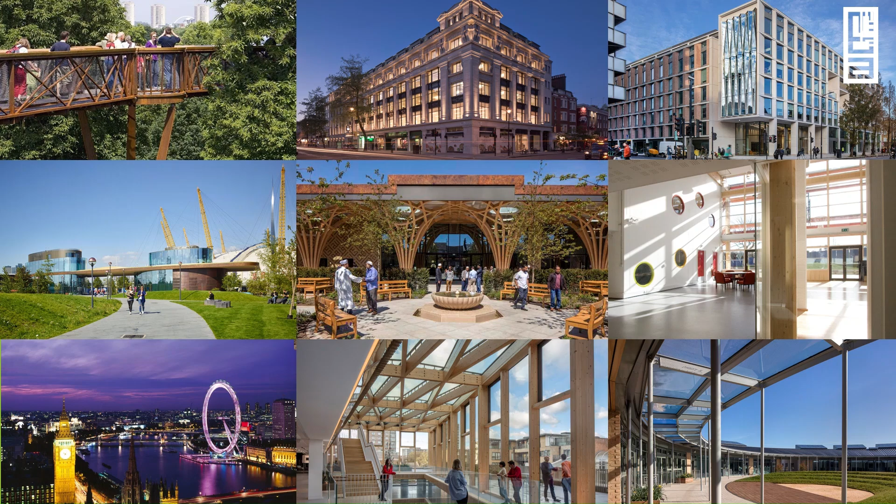I founded Marks Barfield, as we've just heard, with my partner David Marks more than 35 years ago, and our project portfolio is unusually diverse across many sectors: culture, education, infrastructure, leisure, workplace, public realm, and the sacred. And it also includes self-generated projects like the London Eye and the Brighton i360, where we made a leap to become entrepreneurs as well as architects.

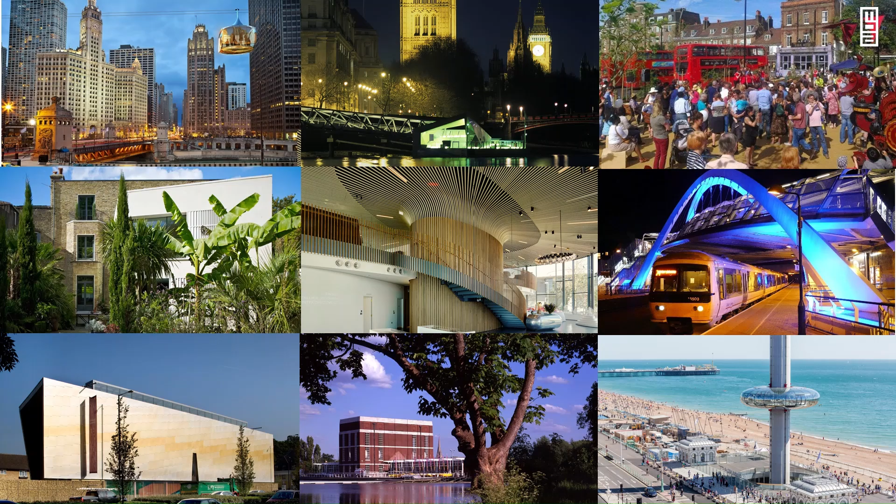We've been told that our work is difficult to categorize, which we relish. We don't have a house style, and because we have kept the practice relatively small, we don't have a huge portfolio of completed projects. It's quality over quantity, and every project gets huge attention and is unique, coming as it does from a thorough understanding of the client's needs and aspirations, the site, its context, its history, and broader social and environmental imperatives. All our projects are site-specific and deeply rooted in their place. So it would be strange to us if each project was not very different.

We operate from our studio in Clapham South in London, and we've won quite a few awards. We've had a 50-50 gender balance from the beginning. We've got a commitment to a technical edge. We like working with engineers, and we have a strong social ethic. This is something that we wrote together in the early days about the belief that design is a powerful tool for good, both social and environmental, and at its best it improves the quality of people's lives and lifts their spirits while drawing on a minimum of the Earth's limited resources. So that's really been a kind of guiding light for the practice since the beginning.

We've always integrated sustainability into our projects from the very start, but now, with the climate crisis, we realise that conventional sustainability is no longer enough. Our ethos is one where we like to work in true collaboration with engineers, right from the beginning, such that the design emerges from the way the building works, not just from the way it looks.

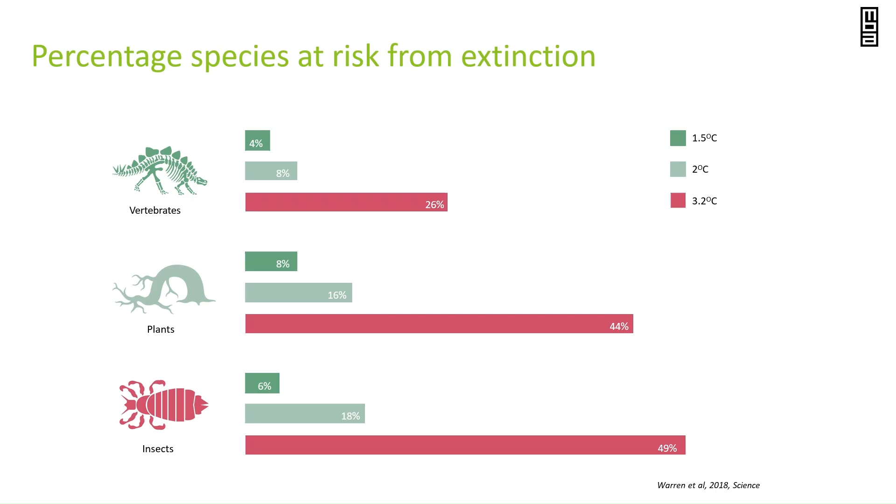And according to the Climate Action Tracker, we're heading for 3 degrees by 2100. And if you're in any doubt of what 2 or 3 degrees means, this is what happens to species extinction in terms of vertebrates, plants and insects. But I'm not here to be a doom monger. I believe there is hope because there are solutions. And I always love this cartoon because it shows that if we respond appropriately, it can actually make the quality of our lives better, not worse.

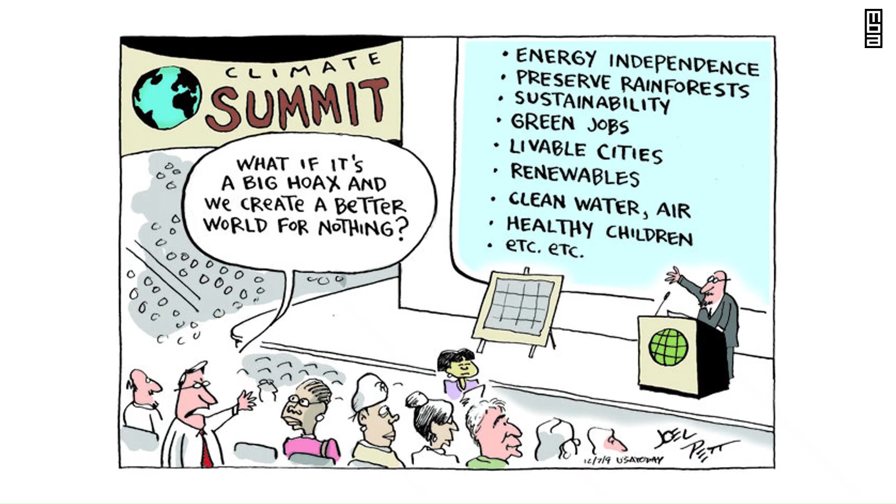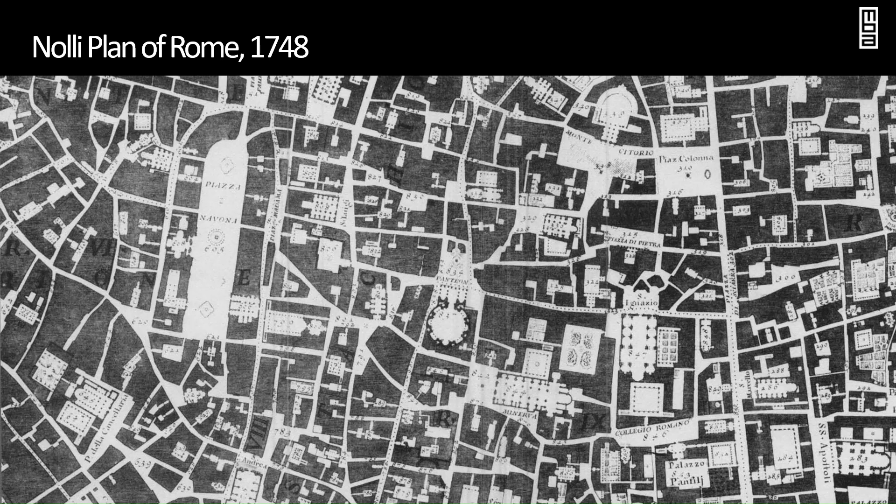Now, I'm just focusing on the architecture of place. I'd like to start by referring to the Nolli plan of Rome from 1748. And it was revolutionary at the time because it was the first time anyone had looked at a city through the lens of private and public space, where private and civic buildings are dark and the public spaces are white. And I'd also refer to the wonderful Japanese concept of ma, which is defined as the spaces in between, not as vacant voids, but as opportunities to evolve a sense of balance, tranquility, and beauty.

And this is one of the places. So the point is that placemaking is not just about the buildings, it's about the spaces between the buildings, what we now call the public realm. And the fact that we can create those spaces with the buildings, I mean, this is one of the best examples I know of where spaces are created with the buildings. And we've got to think of London squares, think of courtyards, think of all of that.

Now, this is one of our first urban realm projects near our office in Clapham Old Town. And we were brought on board by a local authority because it got itself into a bit of a pickle. They were trying to upgrade the triangle that you see there and turn it into a public space. And it's not a simple space because you'd still have to accommodate the buses with bus stands and bus stops. And the previous designers had taken all the buses out and then created a wall of buses between the space and the common, and this did not go down very well. All of a sudden there were these action groups that were starting: no bus wall, save our Clapham Old Town.

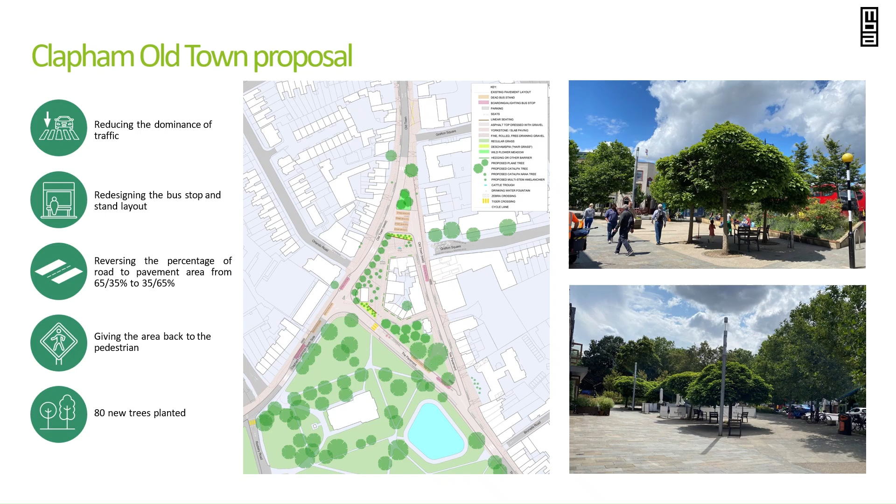And we stepped in, and through a good deal of public consultation, we redesigned it to get rid of a gyratory, strategically redistribute the buses just around, while keeping some still in the middle. And we managed to reverse the area from 65% road and 35% pavement to 65% pavement and public space to 35% road, as well as planting more than 80 trees. So we managed to transform the area completely, giving it back to pedestrians. And this is the result of the space that's been created, with this planter at the back that hides the buses. And those are the amelanchiers out in the springtime.

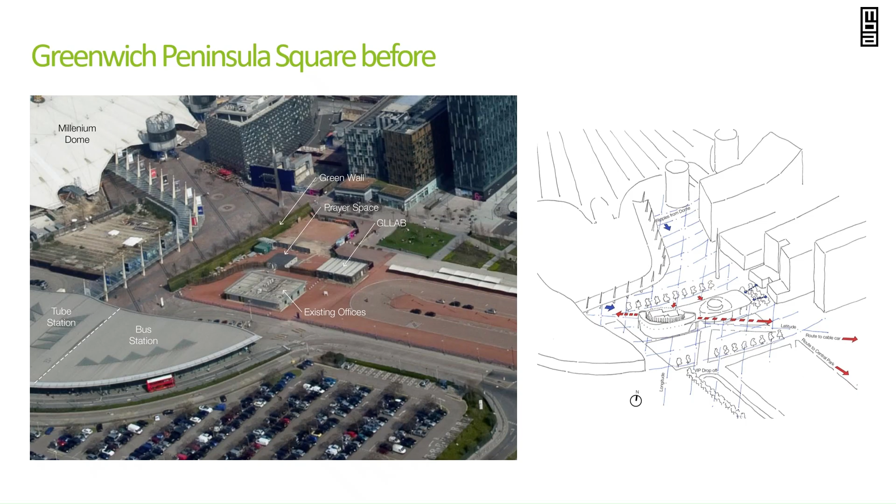Now, in Greenwich, we were asked to design a marketing suite, office, restaurant and cafe and a sky bar on the south side of Peninsula Square by the Dome. And this is the site before we started. And despite being a small area within our brief, our aim was to define the southern edge of the Peninsula Square and for it to act as a gateway to the south, to the cable car and to the Central Park. So we created a pair of curved glass pavilions linked by a clear span canopy, and that was inspired by the geomagnetic lodestones which were used in early compasses and enabled the great world voyages of discovery that the maritime heritage of Greenwich owes its name.

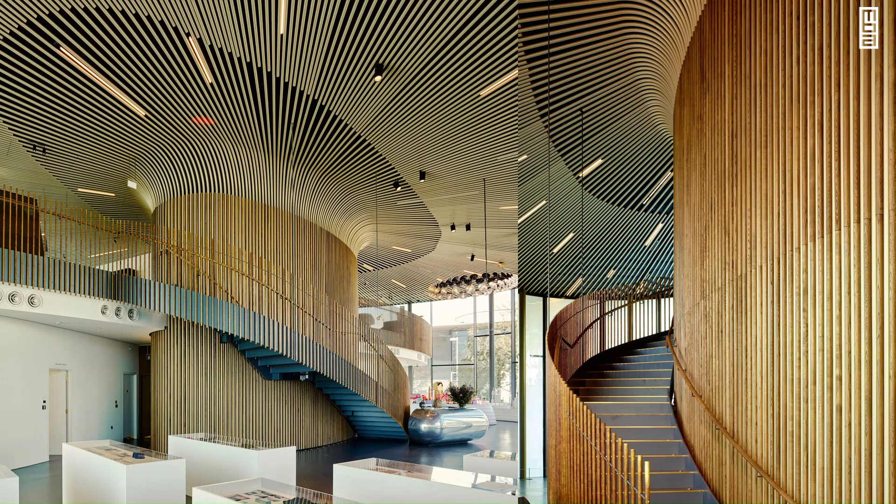And the canopy soffit traces the magnetic field patterns linking the pavilions, creating a space for markets and events. This is the Ma space, if you like. And this is what it is like on the inside. There was actually a gallery there for many years. Sadly, it's now closed down.

And this is a school that we did for University of Cambridge, which I'm not going to talk about in any detail because I don't have time within the 45 minutes. But it was definitely designed from the inside out. But in doing so, we did create this central space, the Ma space, if you like, in the middle of the school, that's used for all kinds of events.

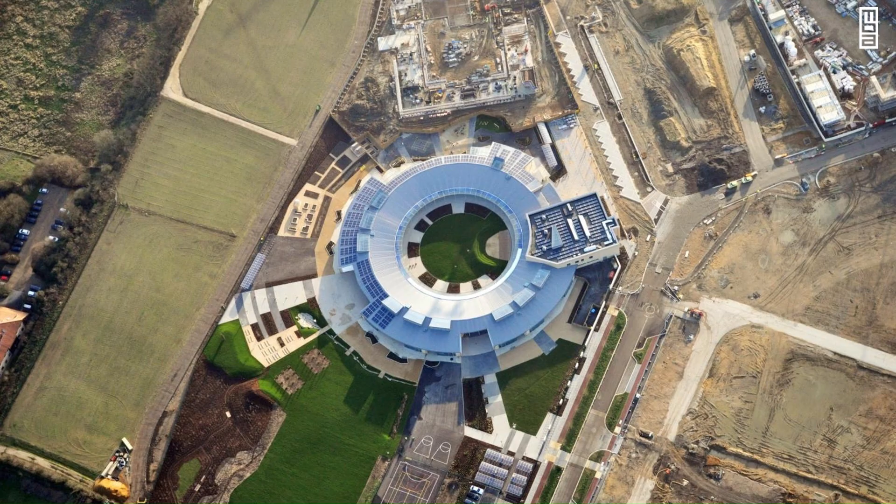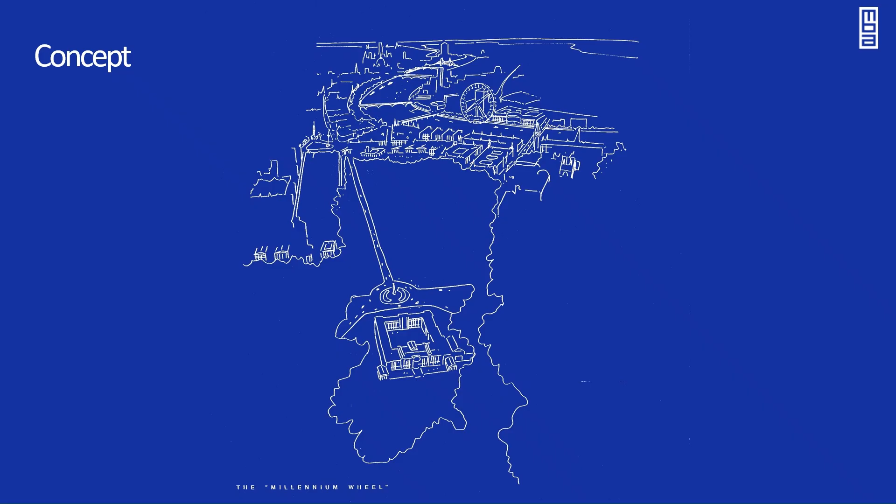Now, another project that we've done, also deeply rooted in its place, is the London Eye project. And it was an entrepreneurial project, as has been mentioned, that came out of a competition in 1993, organised by the Sunday Times and the Architecture Foundation, calling for a landmark to celebrate the millennium. And we came up with the idea of a 500-foot wheel on the South Bank to allow visitors to see London from a new perspective. We didn't win the competition. In fact, nobody won the competition, but we thought it was a good idea, so we started the Millennium Wheel Company and put in a planning application.

The planning application came to the attention of a journalist on the Evening Standard, Mira Bar-Hillel, and she took it to her editor, who was Stewart Steven at the time, who loved the idea and ran a Back the Wheel campaign. And I think he asked the great and the good what they thought of it, and if they liked it, he would print what they said, and if they didn't like it, he didn't. And it also came to the attention of Bob Ayling, who was CEO of British Airways at the time, because he was looking for a Millennium project.

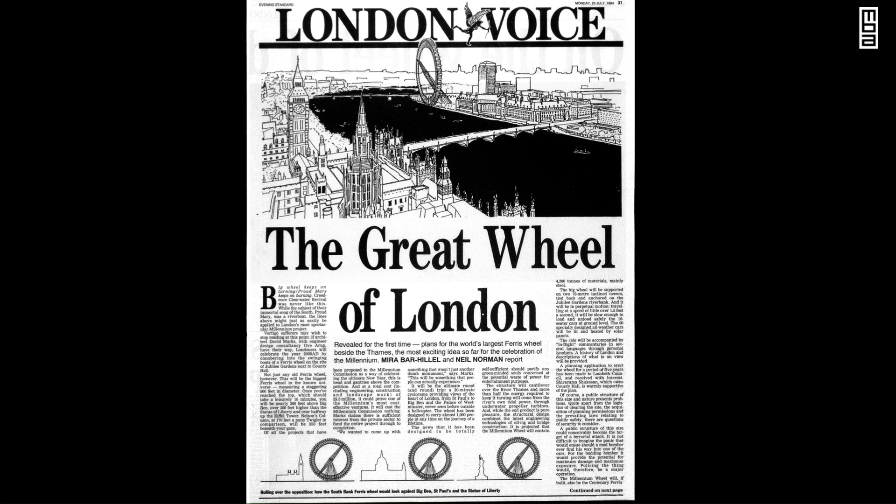And he joined us. He took 50% of the company and loaned the company £700,000. And with that, we eventually, 2 years later, gained planning permission. But back to why this is rooted in place.

If you draw a circle around London and you look for its centre, it is virtually there on the South Bank. And because the project is about seeing London from a new perspective, where better to do it from than its very centre? And the other really important thing at the time was that the South Bank was looking for regeneration. I mean, we found this statistic that apparently 1.5 million people walked halfway across Westminster Bridge, took a picture of the Houses of Parliament, and then walked back north.

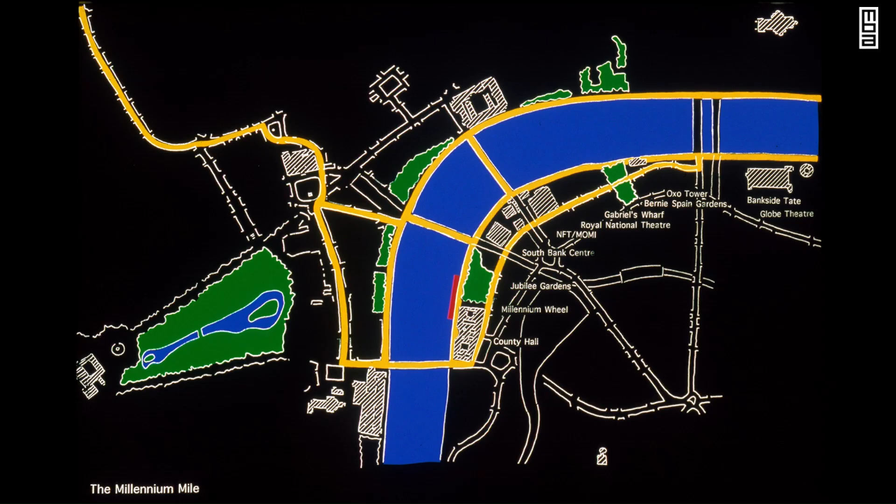And so, of course, what we wanted them to do is come south, which they do in their droves now. So that was another very important factor in placing the wheel there on the South Bank. And of course, it was the site of the Festival of Britain in 1951, so it already had a celebratory heritage, if you like.

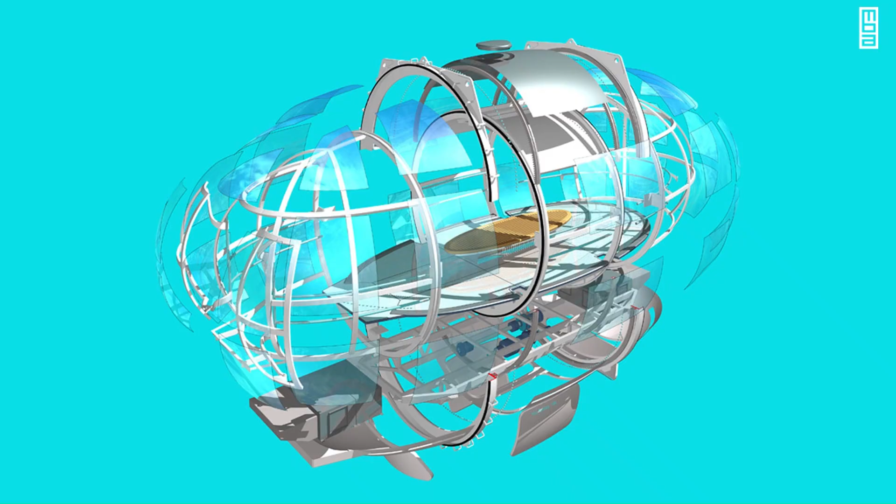Now, I don't have time really to tell you the full story of the London Eye, so just to say that this was the eventual design of the capsules, and I think one of the things that makes the London Eye unique is the fact that the capsules are on the outside, and that was very deliberate. It made it much more complicated because we had to have drive mechanisms to keep them horizontal. But the reason why they're on the outside is so that when you're at the top, you have 360-degree views, almost like being on top of a mountain in the middle of a city. That was what we were after.

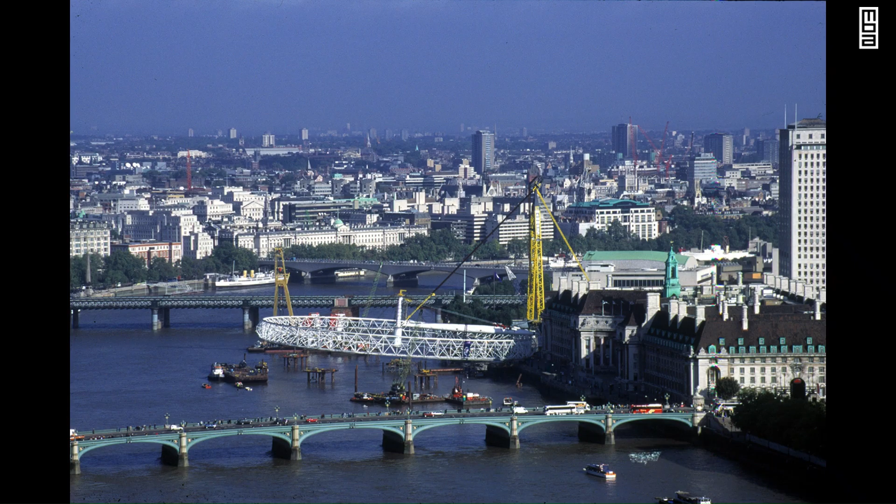But the most difficult thing was getting the funding, and it took almost 2 years, such that we had to actually build the wheel in the end in 15 months. And of course we had the immovable deadline of the millennium. But I don't know if you may remember that we built it horizontally in the river. This is it lifted to 30 degrees. We were told it was the biggest lift of a single object at that time that had ever been done.

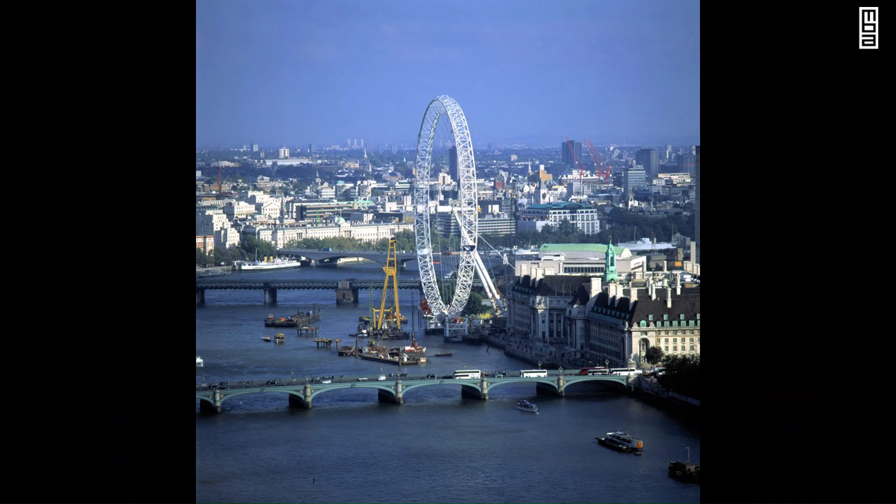And this is Boadicea welcoming the London Eye onto the skyline. And this is it vertical, without all the capsules. And of course we did make the deadline, even though there weren't people in it. And the Evening Standard was appropriately enthusiastic. And we actually went out to dinner with Stewart Steven, and he told us that he actually didn't think we had a hope in hell of getting it, but he was quite happy to be proved wrong.

And one of the things about the project that I'm most proud of is that we originally had 5-year planning permission, and we got it extended to 20 years, and David and I suggested that as part of the Section 106, 1% of the ticket revenues from the London Eye should go to the local community. And that has happened over the last 20 years, and it's amounted to more than £14 million. And that's really to go to community groups, but also to help with the maintenance of Jubilee Gardens and maintenance of the area. So yes, I'm very pleased about that.

I'm going now to talk about a fairly recent project. It's a mixed-use project near Euston, and top right you can see what the building was like before. And it combines office, residential and retail at ground level. And you can see in the diagram in the bottom right that the residential is kind of slotted in to the side. And we create these stepped landscape terraces at the rear, which continued through and outside and created double height spaces which were articulated on the facade.

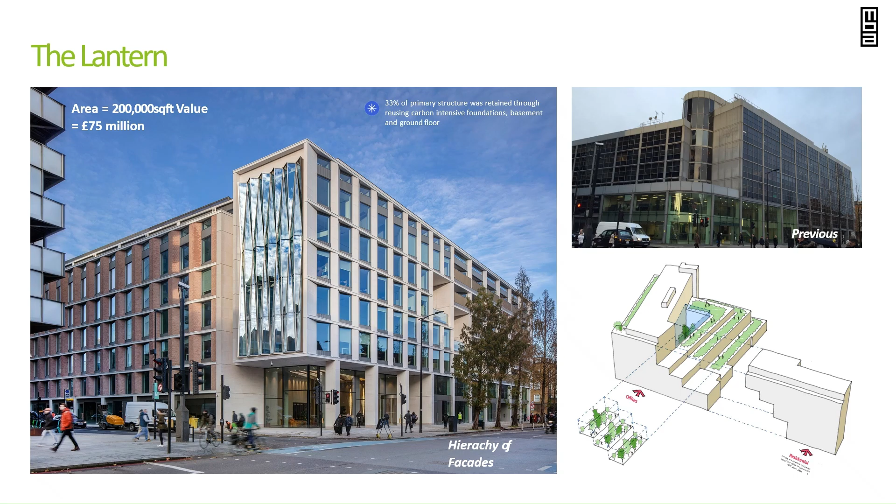And we didn't completely demolish it. We retained 33% of the structure. And it's located just north of the West End. And when we first visited the site, we noticed that because of the bend in Hampstead Road, because that's Hampstead Road that comes up from Warren Street Tube Station, and it just bends at that point, the site is actually very visible from quite a long distance away. And so we saw that as an opportunity to create a feature that has actually become the kind of building's identity.

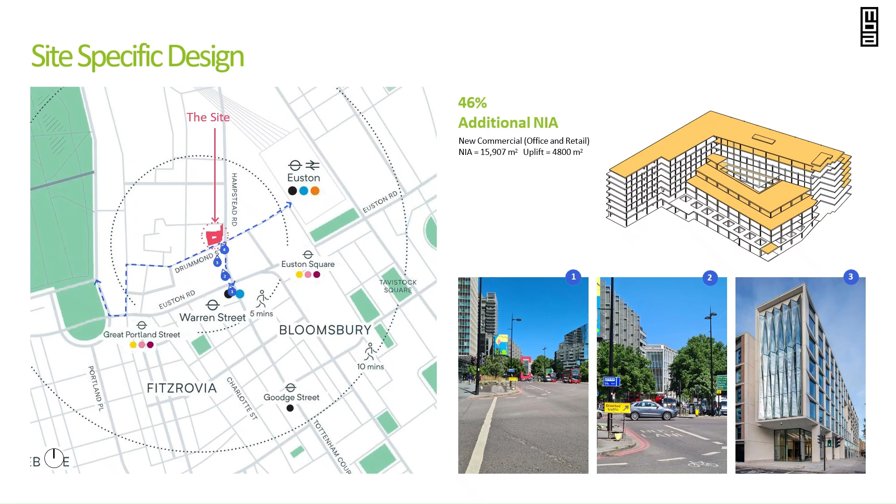And it was also an opportunity to create special spaces within the building, creating long views that look down out at Tottenham Court Road. On this project, we made health and well-being a major focus of the design, after we appreciated that in a typical office building, 90% of the costs are actually for staff. So happy people, it's a really important thing.

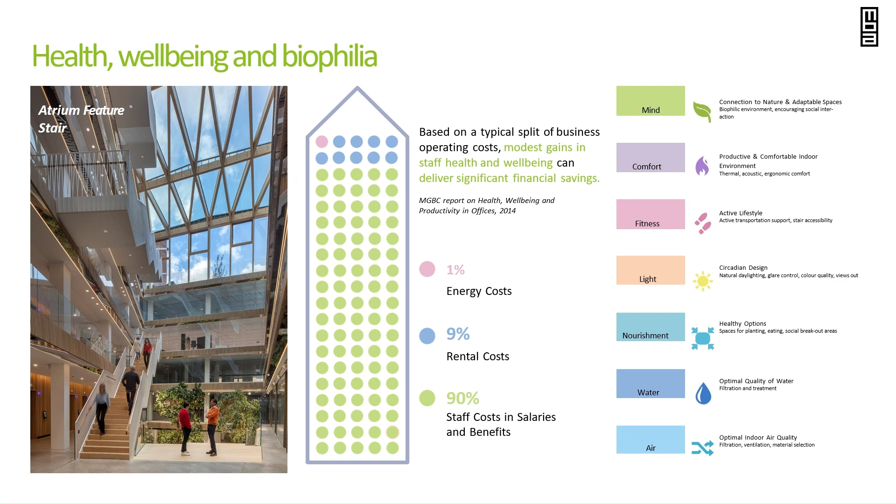So we really focused on trying to make sure that people were encouraged, for instance, to use the stairs, not necessarily go on the lift, that there was plenty of biophilia and natural materials. So you can see on the left, this is the atrium, and we have trees growing in there, and so this is the atrium.

It's actually a multi-tenanted building, so there's a number of different companies, but we created this kind of commons area at the bottom of the atrium, which was actually where the car park had been. And that's where all of the people from the different companies can actually meet and interact, and they do, apparently, and they appreciate it very much.

We also created little kind of moments of delight. So in the spandrel panels around the atrium, we put these mirrors that actually just keep reflecting the greenery and kind of moments of movement in the building. And we've even got a rill, so if you go, you can hear the sound of running water. So I think the connection to nature is just so important.

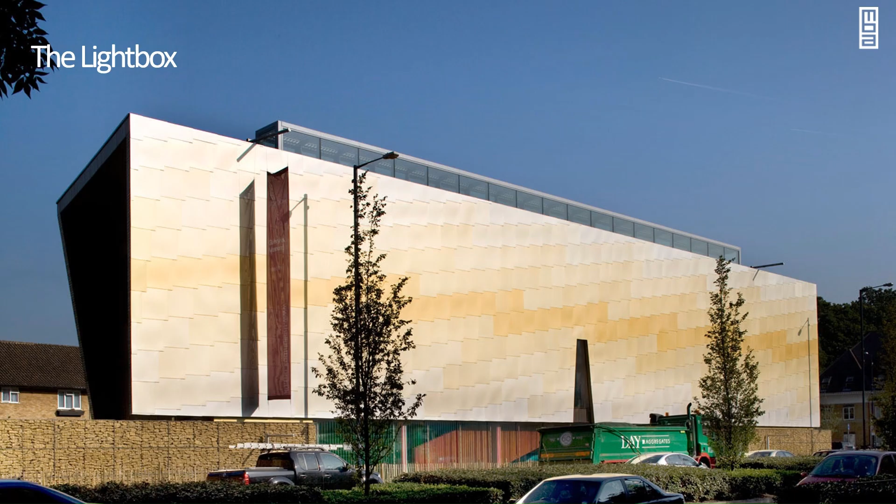And then just quickly, this is a building that's not too far from you, and we have in our audience the ex-director of the Lightbox, Marilyn Scott. So it was built on a slither of land. It's very much deeply rooted in place.

It was built on a slither of land between the Basingstoke Canal and a 5-lane highway that separates the site from the town centre. And the roadside cladding is solid and metallic to protect it from the noise and pollution, etc. And then it opens up and orients itself to the canal side. And also the building is positioned to the farthest east point to create this garden, which benefits from afternoon and evening sun.

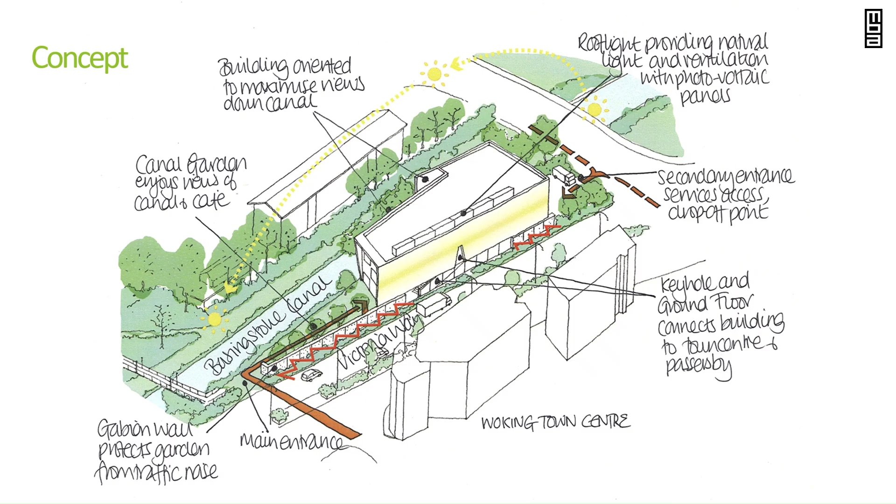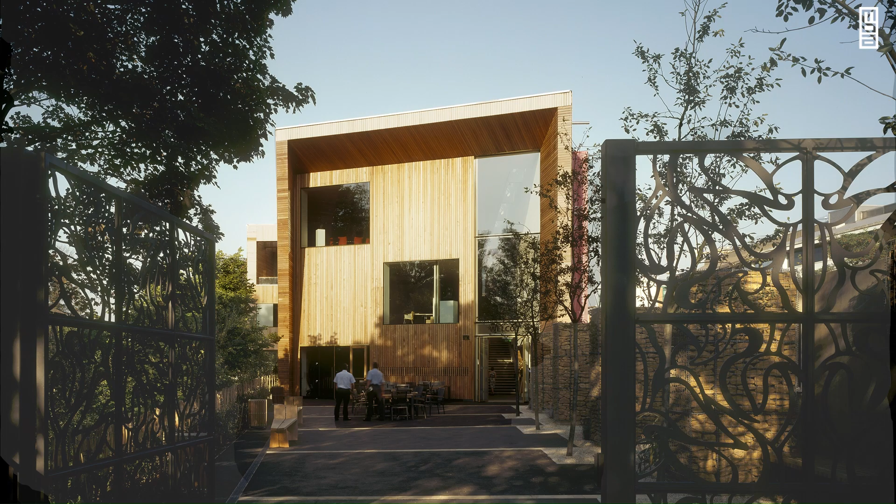It was conceived as a cultural treasure box and has got the gold and silver overlapping panels; on the roadside they are solid except for the keyhole window in the middle. So this is the garden. So all the rest of the building is orientated to the canal. It's all in timber, and it's all completely naturally ventilated, apart from the galleries, which obviously have to be very carefully controlled in their environmental aspects.

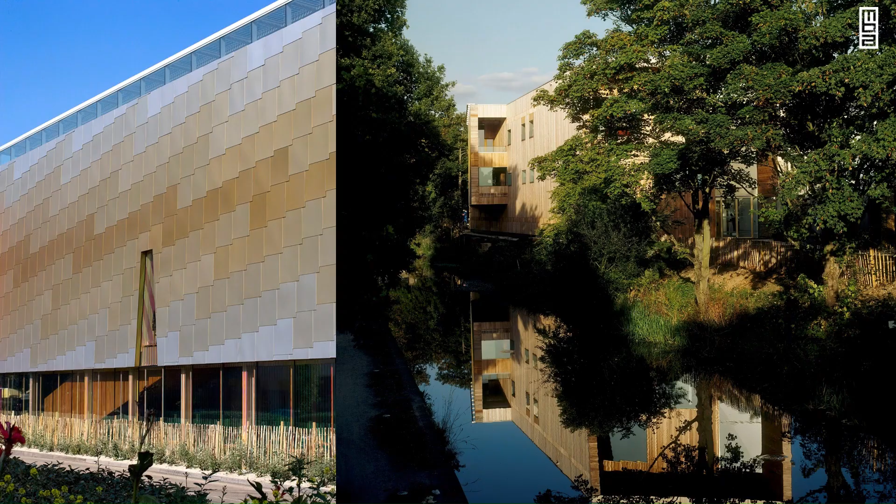And this is the canal side on the right and the road side on the left. It's quite schizophrenic in a way. And this is our treetop walkway, conceived to give visitors to Kew an experience of the forest canopy. The tree guy in Kew had spent a long time in the Brazilian rainforest, and he wanted people to have that experience in Kew.

And a very early decision was to build it out of Corten steel, because Corten is long life, low maintenance, and has this beautiful patina of rust that protects it from the weather. And it's obviously a material loved by sculptors. The walkway consists of a series of circular nodes at 15-metre centres, with 12-metre walkway sections between them. You can see it's not far from the Temperate House in Kew, or not far from the Palm House.

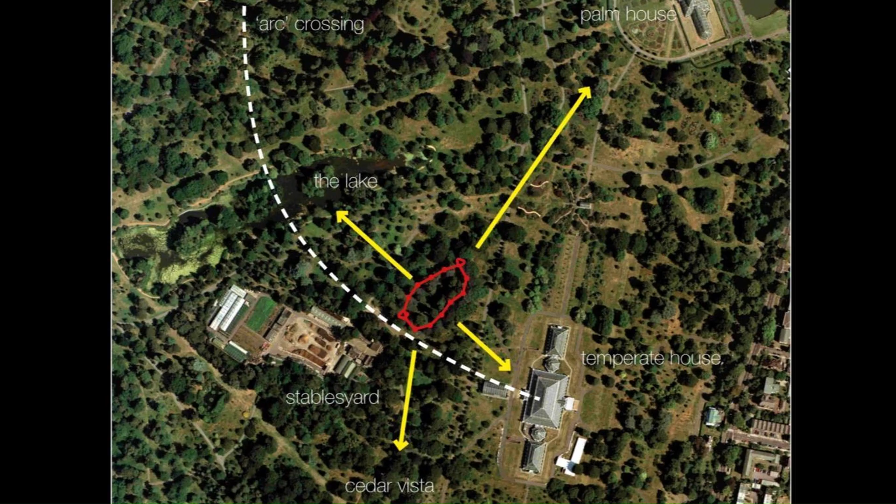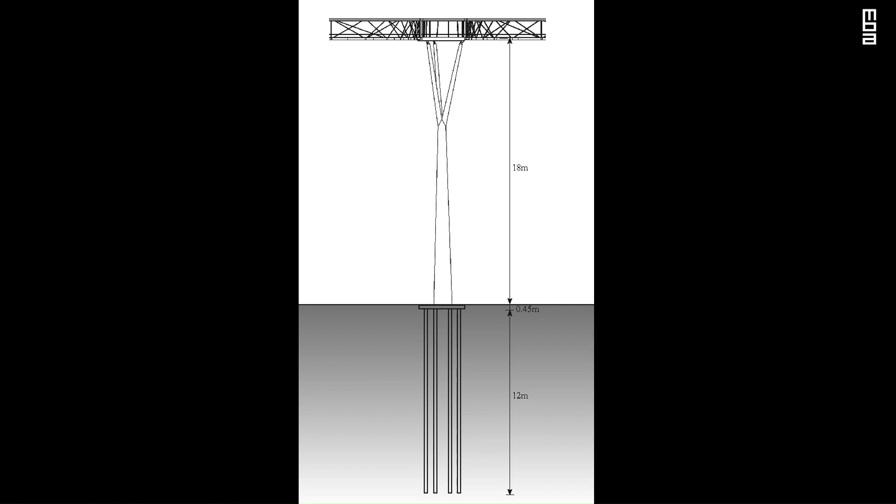And because Corten only comes in flat sheets, the pylons are triangular in section, and we could make them taper to the top, and then they trifurcate to support the circular nodes. We decided to put the structure into the handrail to minimize the visual appearance in the natural setting. And this is one of the 12-metre walkway sections laid flat. So imagine that it's actually kind of a U shape.

And you can see that it's got these sections; the structure is inspired by the Fibonacci sequence. And this makes sense structurally, that the ends are more dense than the middle.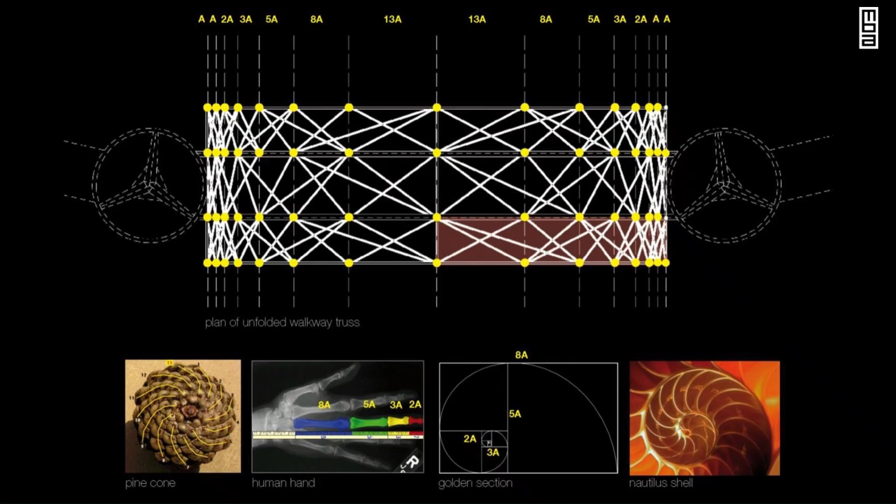So this is a kind of... And many people imagine that tree roots go down far into the ground, but in fact they spread out horizontally, and they're really not very deep. So we had to be very careful not to kill the trees that we were hoping to admire. And we had to have a root survey done so that we understood exactly where all the roots were.

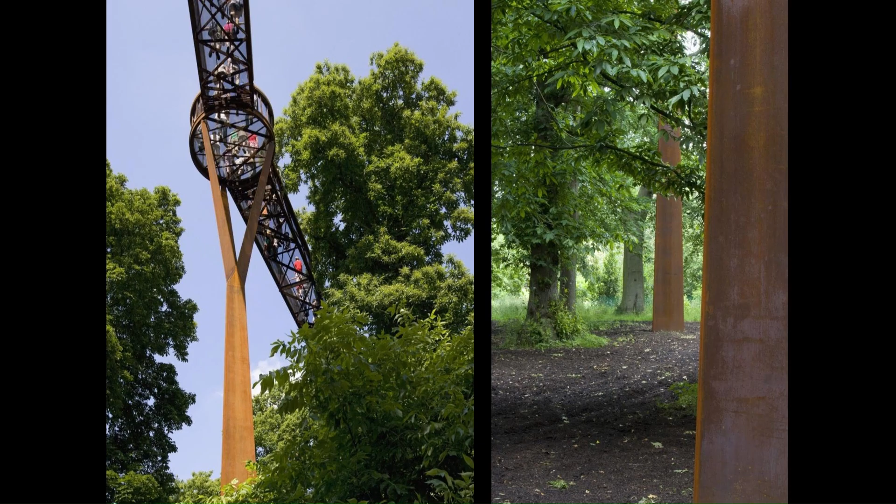And the pile caps were in steel to make them as thin as possible so that they could be hidden under the ground. And each pile cap was completely bespoke. And in fact, when we got the survey, we actually had to change the route of the walkway so that we avoided some of the main roots. So this is the walkway there, and you can see how the Corten really does. It stands out and fits in at the same time.

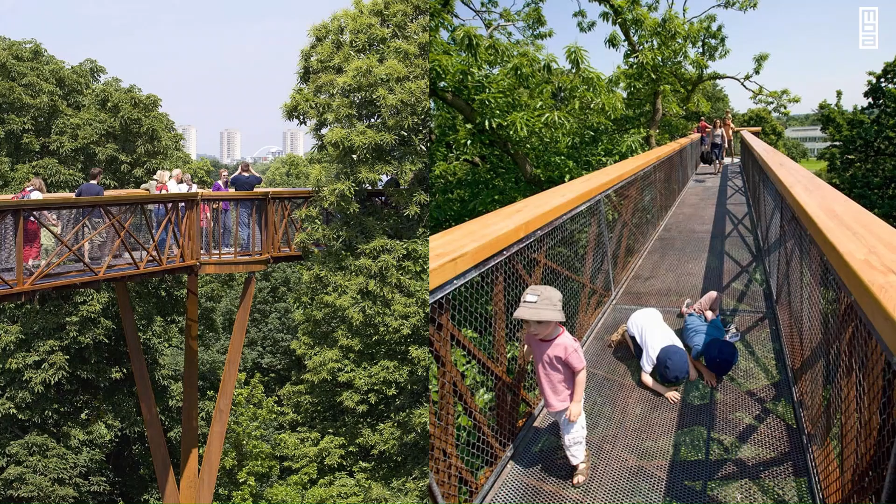And this is the walkway on the top. It's 18 meters high. It's quite high, but you do feel safe because we made the handrail quite a bit higher than you would normally make it.

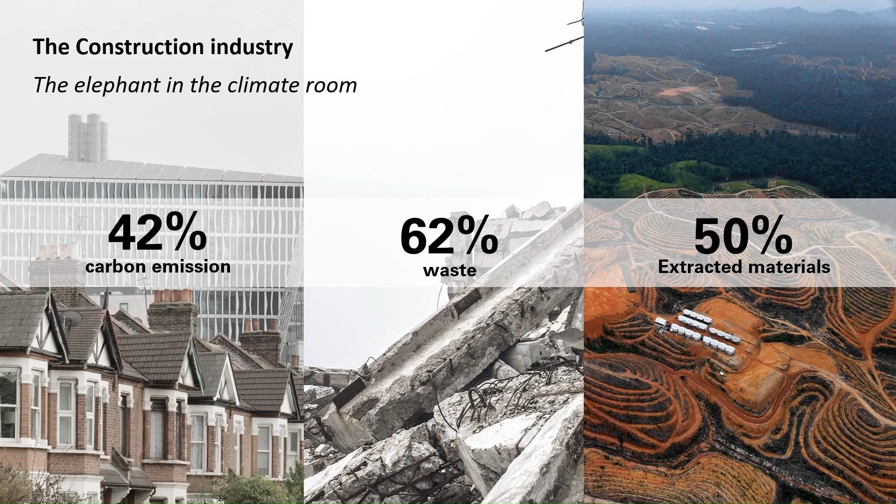Now, just wanted to show some more recent projects, because what we've become aware of in the last few years is that the construction industry is really the elephant in the climate room. So, 42% of emissions coming from the construction industry, 62% of waste. That's really something that shocks me every time I see it, and 50% of extracted materials. So, as an industry, we really have a responsibility to respond to this.

And as a practice, we are really trying to become a more regenerative practice, not just sustainable, but regenerative. So it's not just about doing less harm or doing good. It's actually wanting to be doing more good and become regenerative. And we've become very active. I'm on the Architects Declare steering group, and I have been since 2019. And we're trying to influence policy.

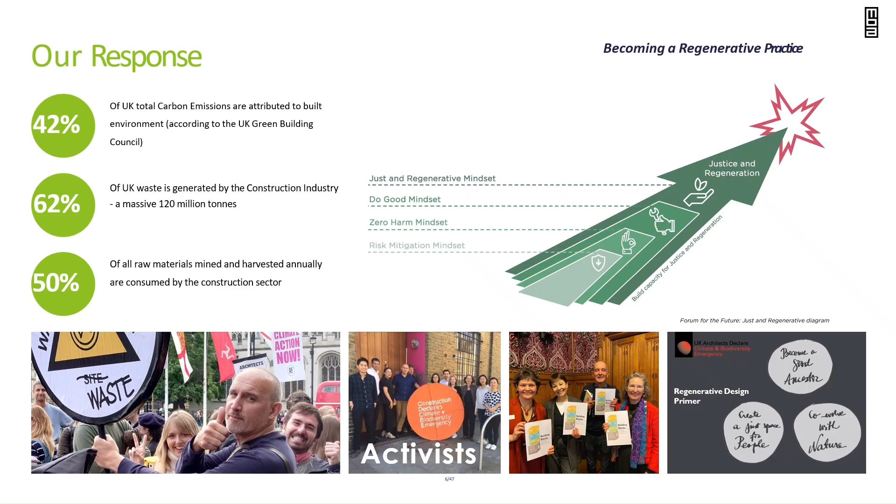That's us in the House of Commons last week with Kate Raworth and Kevin McCloud and Caroline Lucas. We did a building blocks manifesto of trying to suggest ways that the government could respond in legislation. So one of the things that we've done is we've completely redone our material library to focus on low carbon materials and biomaterials. And this is a project that illustrates that.

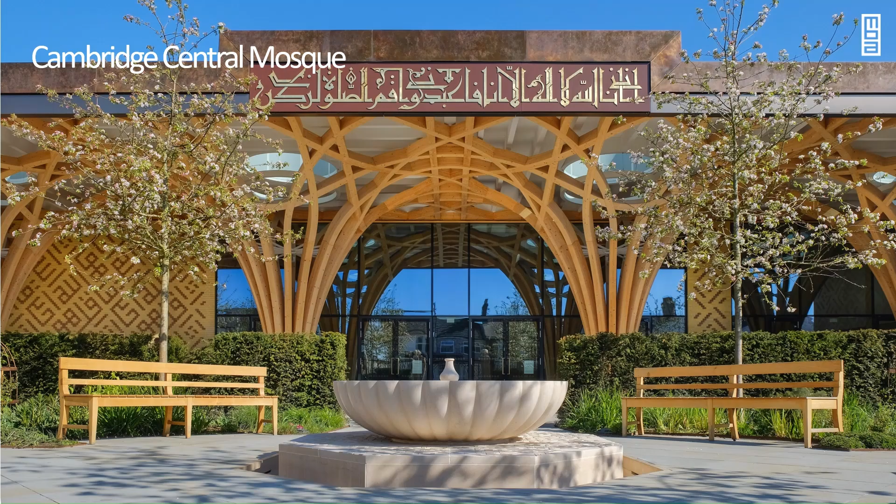So it was a mosque that we won in competition in 2009 and took 10 years to build, mainly because of funding. Again, funding is always the difficult bit. And this just shows the need. I like that slide. Yes, it just shows that they were bursting out of the mosque that they had.

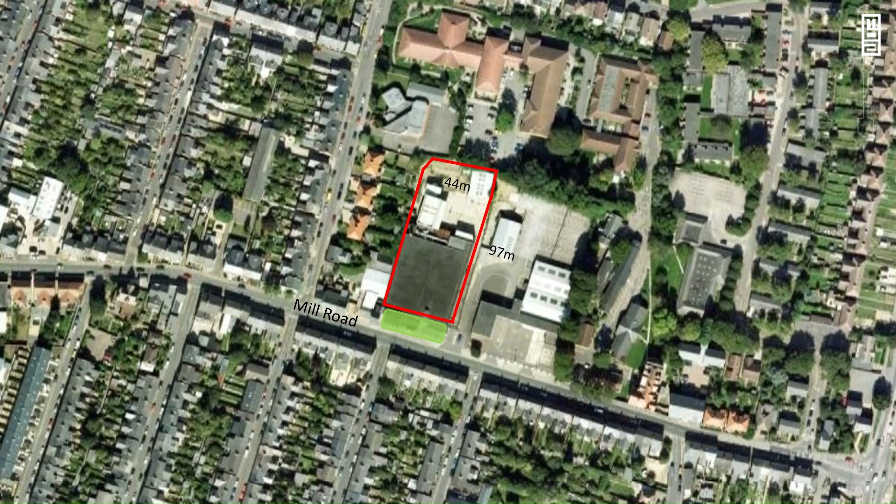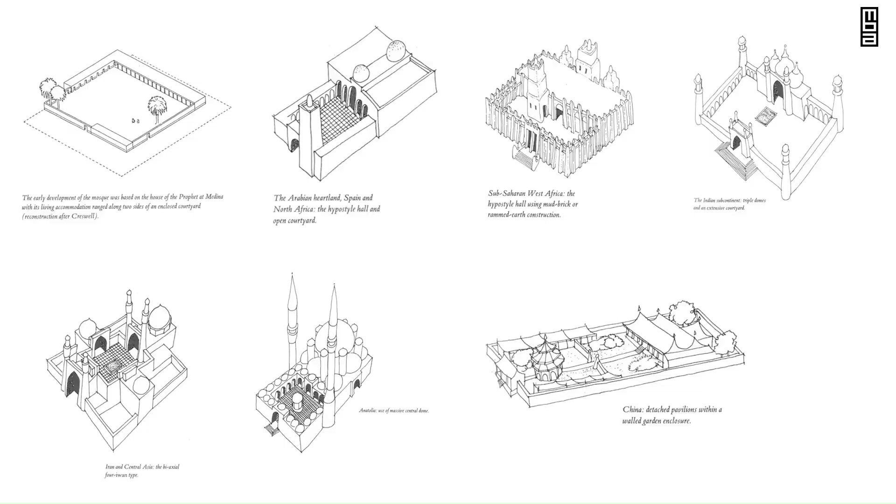And this is the site. It was a site in Mill Road in Cambridge. It's a very residential area. It had been a warehouse for John Lewis. And of course, we hadn't done a mosque before, so we needed to do a lot of research. And what we found was that for centuries and throughout the world, mosques have adapted to their local cultural and climatic conditions and used their local vernacular. And so we asked ourselves, what should a British mosque be in the 21st century and in Cambridge?

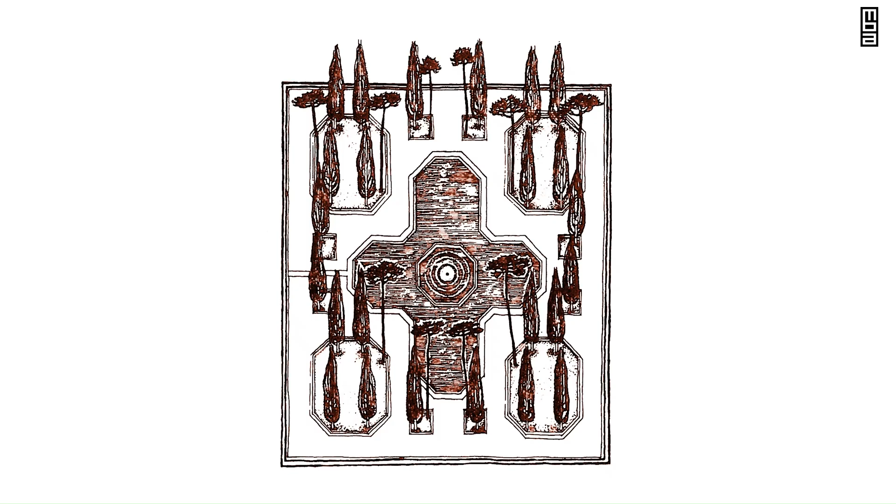And we researched Islamic sacred architecture, and of course we looked at English sacred architecture. And we didn't have to look very far, because the English fan vaulting of King's College Chapel was a great inspiration, as well as looking at what the vernacular was of Cambridge, with its gault bricks with red highlights. So the idea of the Garden of Paradise was also an inspiration. The idea of a calm oasis of contemplation, and a grove of trees with the water fountains symbolizing the source of all life.

And this is the final plan, and so Mill Road is on the left, and what it enables people to do is take a journey from Mill Road through the community garden, through an Islamic garden, through a portico, and really move from the day-to-day world to a more reflective and spiritual one. And then they move through to the lobby, and either side of there are the ablution areas, the men and the women, and then to the main prayer hall, which is orientated to the Qibla wall, which is orientated to Mecca, which is why it changes in angle.

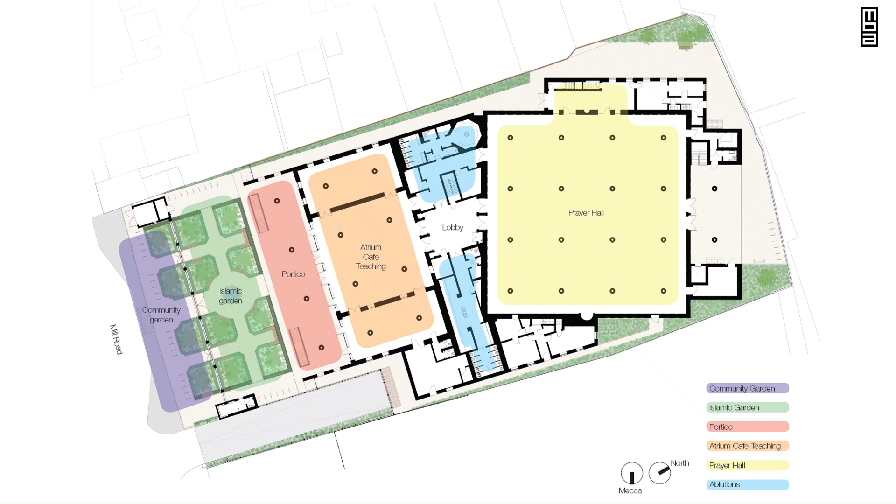Seems to have got slower in its changing.

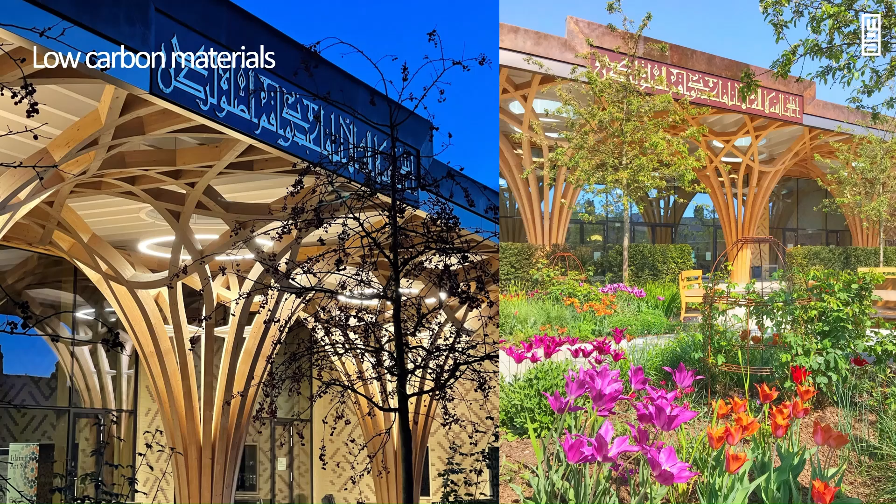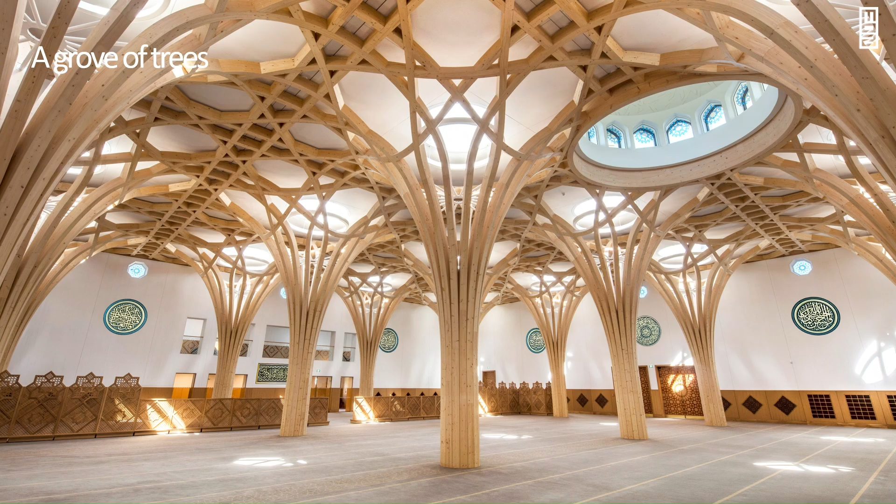And actually we found out recently that there was an event where, because originally the mashrabiyah screen was going to be fixed and 1.8 metre high, and then through discussions, we managed to persuade them that A, it shouldn't be fixed, and B, it shouldn't be too high. And in fact, the women got involved in the discussions about that.

So actually we were able to leave a gap, because they said, we want to be able to see the imam, and if they have the lectures, we want to be able to participate. But they had an event recently where there were more women than men, and so they were able to move it forward, which I was very glad to hear.

And what's very nice is that they have lots and lots of weddings there now. They have more than 100 weddings a year, and apparently a third of the income of the mosque is actually taken up with weddings. And we heard from the director of the mosque that actually it's all to do with the architecture. So that's very heartening as well.

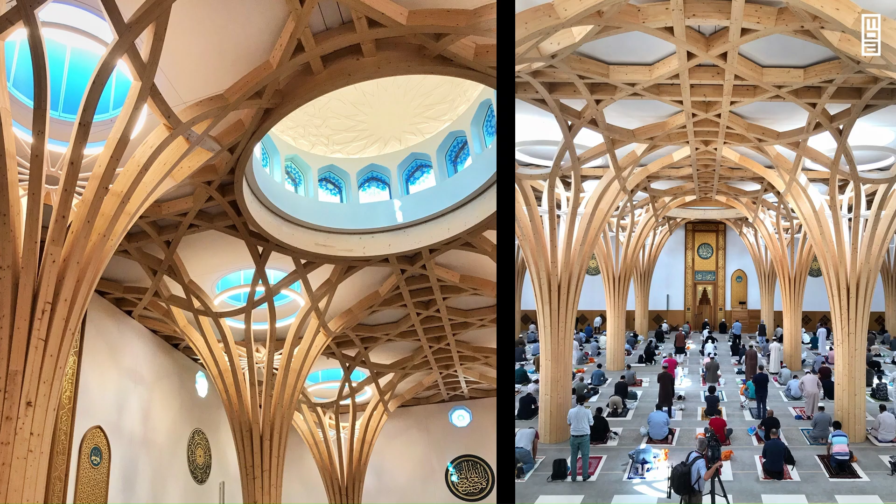And it's very green, of course. It's termed the UK's first green mosque. I don't really like the word green, but anyway. So it's entirely naturally ventilated, and we've made sure it has natural light in all of the main areas, such that you don't actually have to turn the lights on unless it's really dark outside.

The rainwater is used to flush the toilets and to water the garden, and it has no fossil fuels on site. And we made that decision back in 2009, so that was good. It's all air source heat pumps and the like.

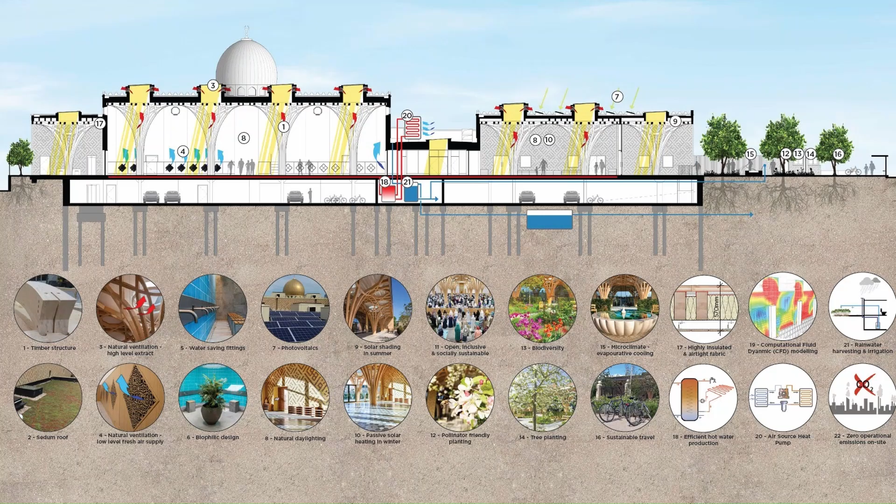So now I'm going to move just to talk about the circular design that we need to move to. We need to move from the linear take, make, waste economy that we've kind of got mainly in the world to a more circular economy, where you make, you use, you repair, you recover, you reuse, you recycle, or ideally upcycle. This is what we need to move to in all of our economy, not just in the built environment.

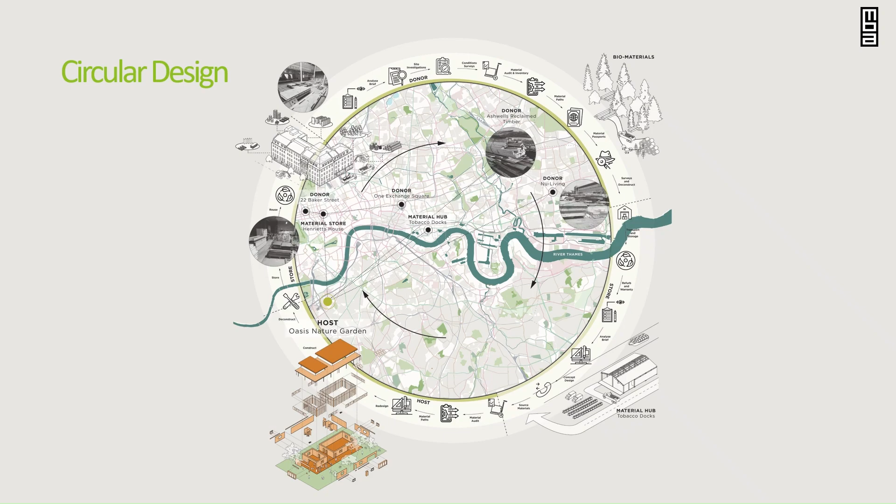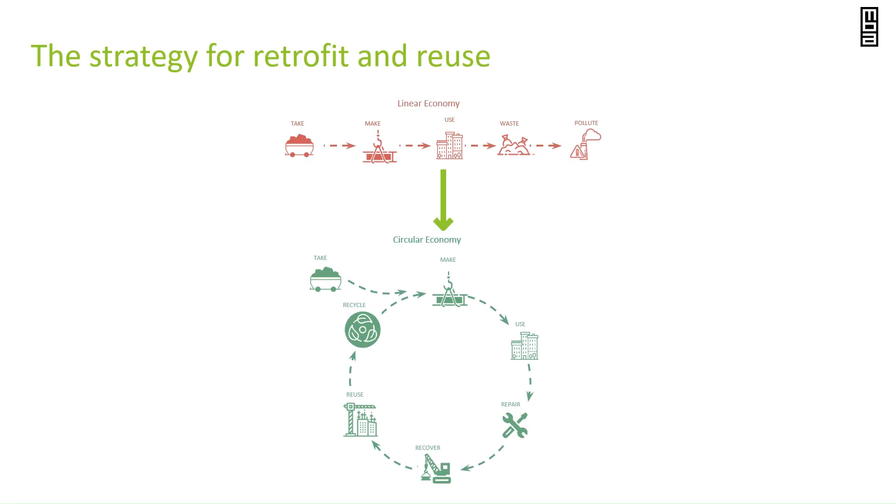And in fact, the government now has a task force, the Circular Economy Task Force, which is looking into this, which is good. And this is what I regard as one of the best examples of circular design. So because of the wheel, we knew Coin Street Community Builders, and that was their office on the South Bank, but it needed to be moved so that the Ballet Rambert could be built on that site.

And we also knew, because where we live in Stockwell, there's a children's charity. They needed a building, and so basically Coin Street gave the building to Oasis if they could take it apart within 2 or 3 weeks. And so that's what we did.

We took it apart, and I have to give credit to Ben Barfield Marks, who happens to be my son, and a friend of his, who in their 4th year of architecture school organised the whole thing so that it was all taken apart. Then they redesigned it so that it would fit the brief of the new site and fit the new site, and then rebuilt it on the Oasis site, which is just next to where I live in Stockwell.

So it's a really good example of where we need to be moving to in terms of circular design. Deconstruction. We need to design things so they can be deconstructed. I mean, the reason why it worked so well was that the original office had been a kind of Walter Segal inspired office that was based on self-build principles, and so that's why we were able to deconstruct it quite easily.

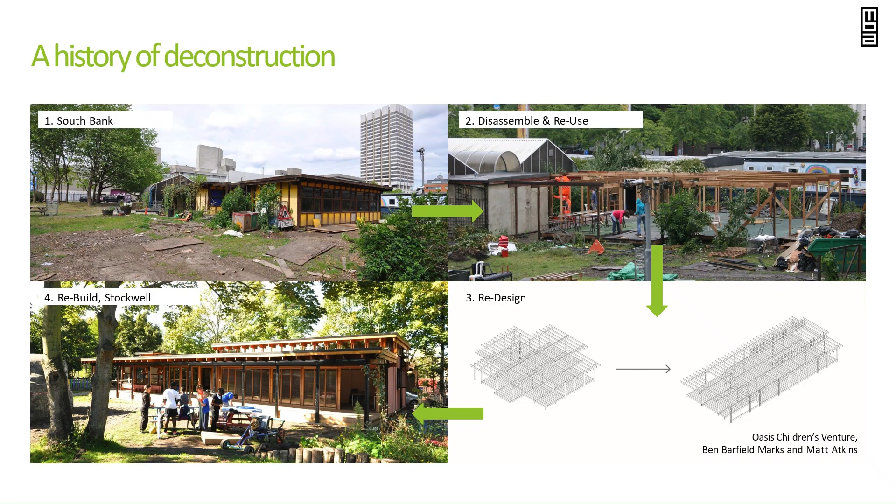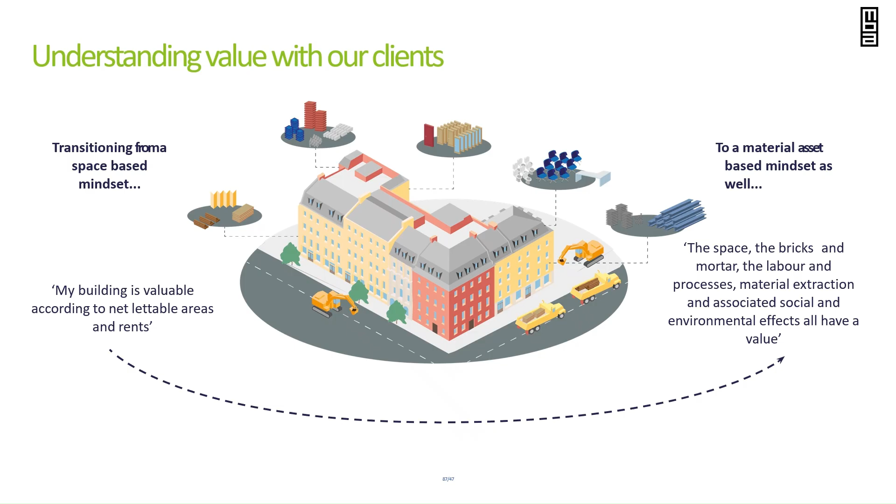And we need to persuade clients of this, and this is how we're trying to do it with some of our clients. They see the value, particularly in offices, as the space that's created, but we're trying to persuade them that the materials are also valuable. They need to change and see the material assets as valuable as well: the bricks and mortar, the labour, the processes, the material extraction. And this is an example of how we are looking at it.

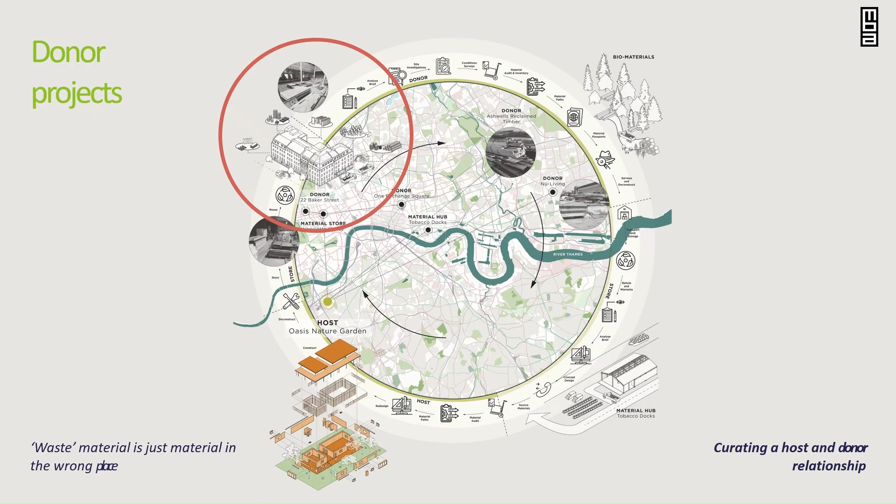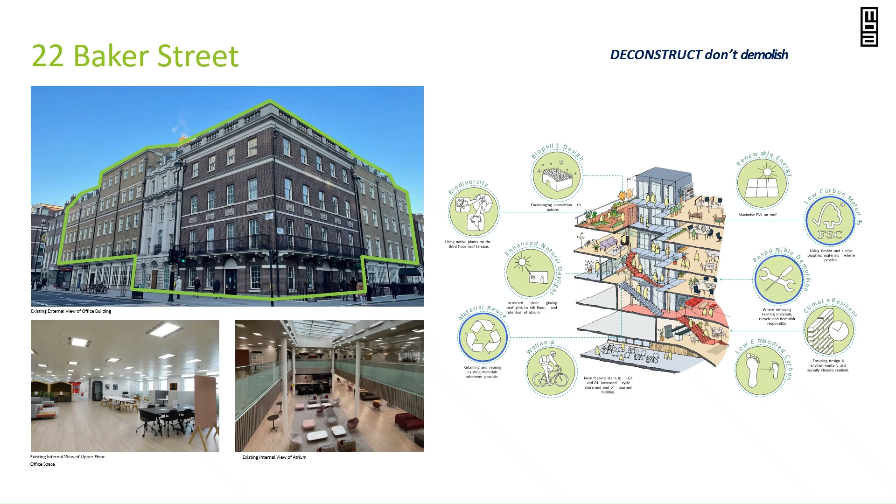So there's a project that we've finished in 22 Baker Street on the right-hand side. This is the office as it was before, and we decided to make it a case study in the circular economy and material reuse. So we did a complete audit of all the materials that were there, and we were only doing Cat A, which is a shame really, but we did a complete audit of the materials and their condition, and created an inventory, and then created a decision matrix as to what was worth keeping and what was not worth keeping.

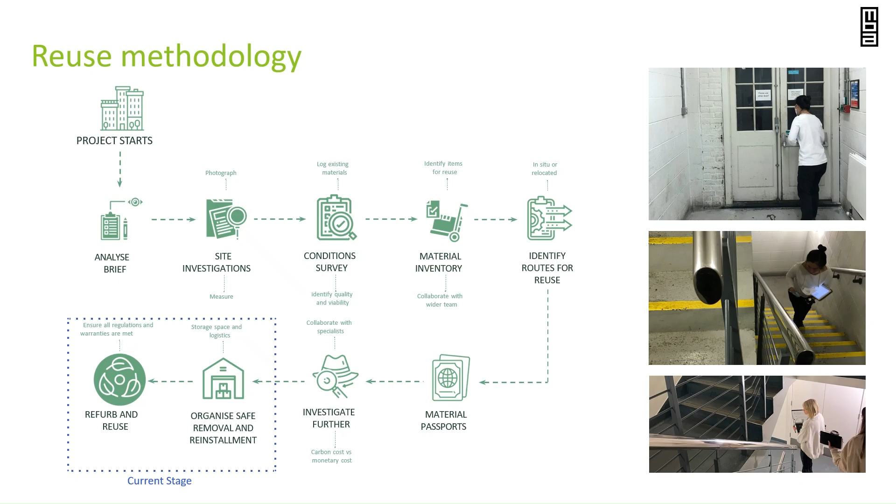And we managed to persuade, and actually the demolition contractor and the main contractor were really up for this. They really wanted to do it. And so in the end, we reused all of the raised floor tiles on site. We couldn't reuse their supports because they'd been glued in place, and so that's a lesson to learn about what not to do in the future. But the contractor agreed to just move them around so that they could be kept on site and kept the carbon calculation low. And we reused all the fire doors.

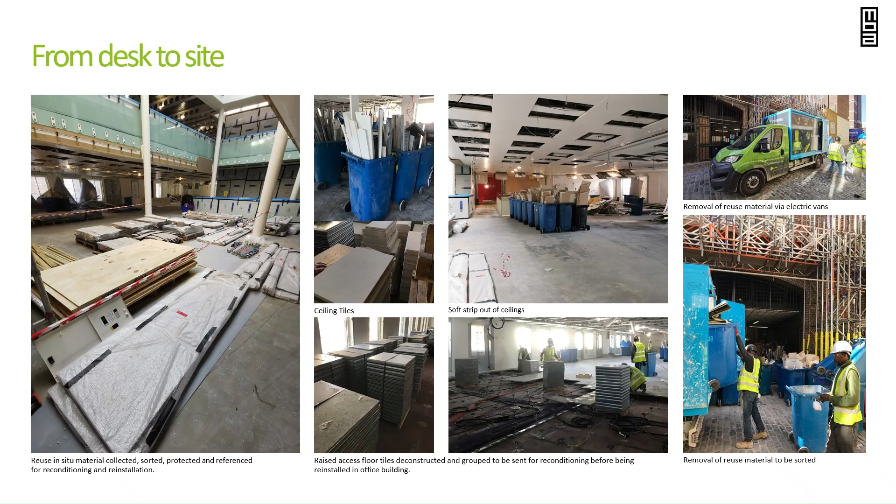And in the end, and this is a figure from the contractor, we actually managed to save the client £1.65 million. I think we managed to persuade him that this is a good thing, that he actually gains from it. And of course, it also saves carbon, 577,000 kg CO2e of carbon. And these are all of the things that we managed to save. So it worked out as a good case study. And obviously we weren't able to use all the materials.

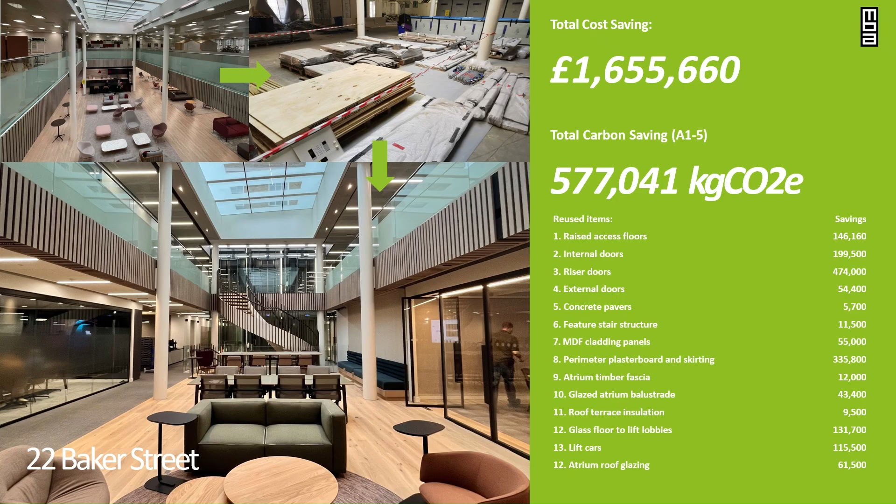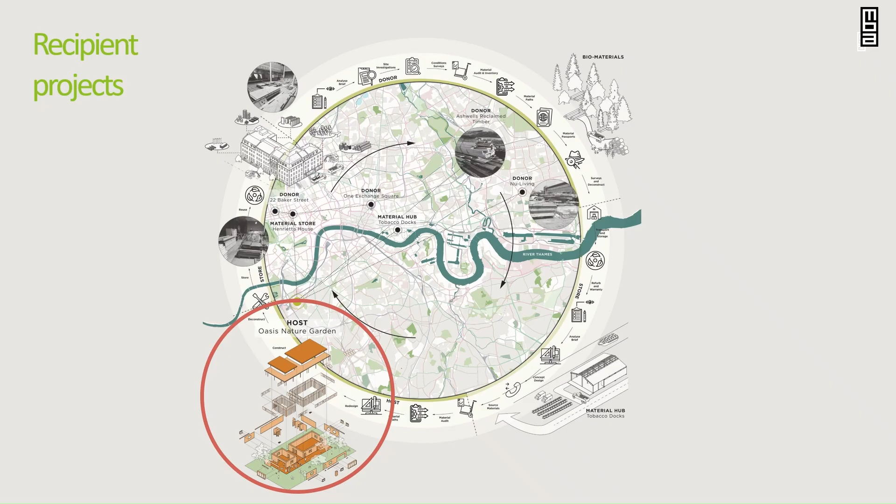And so one of the things that we're also trying to do is a kind of host building. And this is actually not far from the building I just showed you. It's actually for Oasis as well, because they own 3 sites. They have the main adventure playground site, and they have this nature garden site. And so we've designed a building that we're hoping to be built out of entirely 100% reused materials. And we've got quite a lot of them stored away. Sadly, we haven't got the finance for it yet. The funding is always the most difficult thing. But we've actually managed to accumulate quite a lot of the materials that we're going to need to build this. And this is a forest school nursery and a play building for their nature garden site.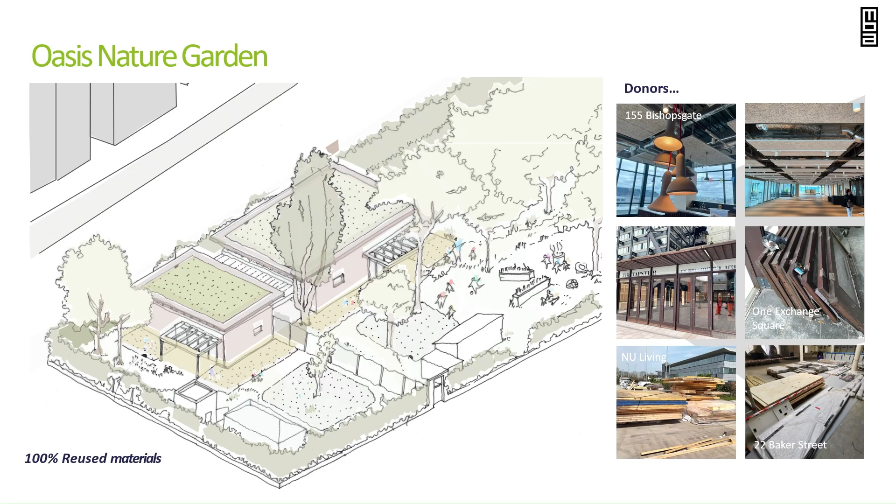And again, we used a similar methodology of trying to collect the materials. And I think one of the things we need to do is redesign the RIBA plan of work, because if you're designing it, you need to know what materials you've got early on, and where the reused materials are. So it's a whole different way of working.

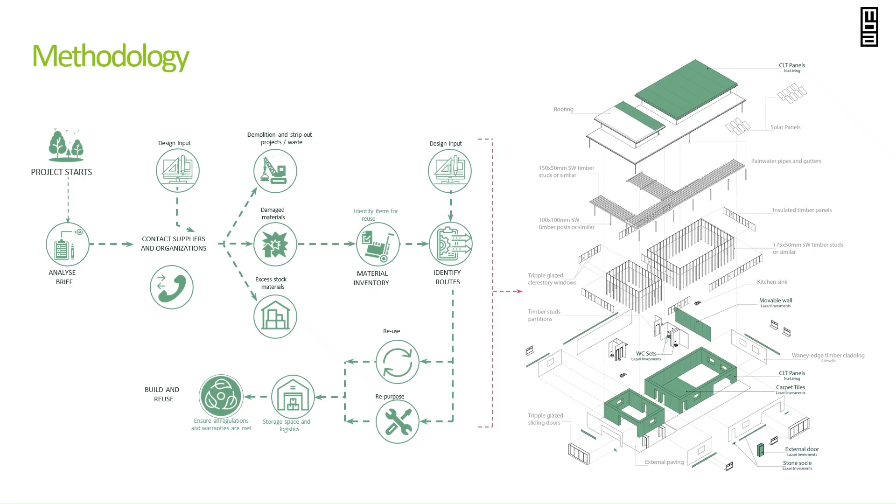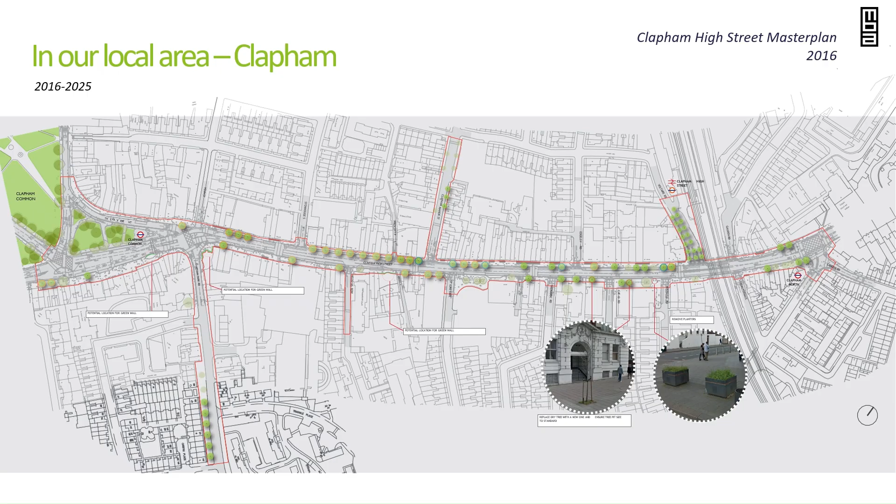And this is another local project to me. I'm on the Clapham Business Improvement District, and we're trying to persuade TfL, because Clapham High Street is a TfL road, to plant some trees. We didn't actually do this; this is a master plan done by others, but we're just trying to exert influence, because trees, as I'm sure everybody in this room appreciates, can reduce temperatures by as much as 7 degrees in hot weather. And we're going to need more of that, I think, as the climate changes.

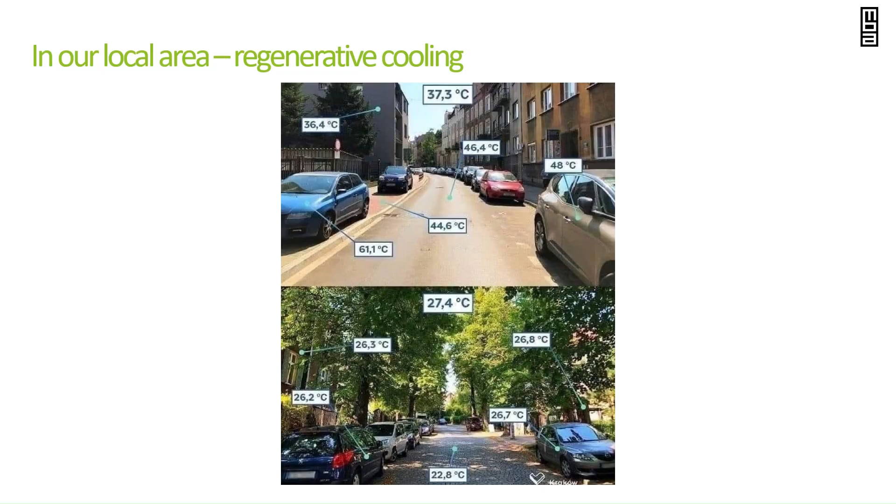You know, they reduce the toxicity in air, they encourage biodiversity, they add oxygen, they soak up carbon, they improve health and well-being, they protect us from flooding. I mean, trees are amazing. And this is just another thing.

We went to Parliament with our manifesto, but a week ago we actually took over the whole of the London Eye, which I can do because we still have that benefit. And we realised that it's quite a good symbol of the circular economy. So we called it the Circular Revolution, and we had about 450 people come from across the industry. That was what was so good.

You know, it was developers, it was contractors, it was demolition contractors, consultants, and we had politicians there. We had actually 4 members of the government's circular economy task force, and the deputy chair gave a brilliant speech.

So we're trying to do that, but I'm just going to finish with this, the last project. I don't know how I'm doing on time, but yeah.

So this is a project that is sort of entrepreneurial again, which is a renewable energy project, and it is at the West Somerset Lagoon. It's basically a lagoon within the Bristol Channel. So the Severn Estuary and the Bristol Channel have the second highest tidal range in the world, and it's completely untapped at the moment. You know, this is a kind of gift of geography, and we're not using it.

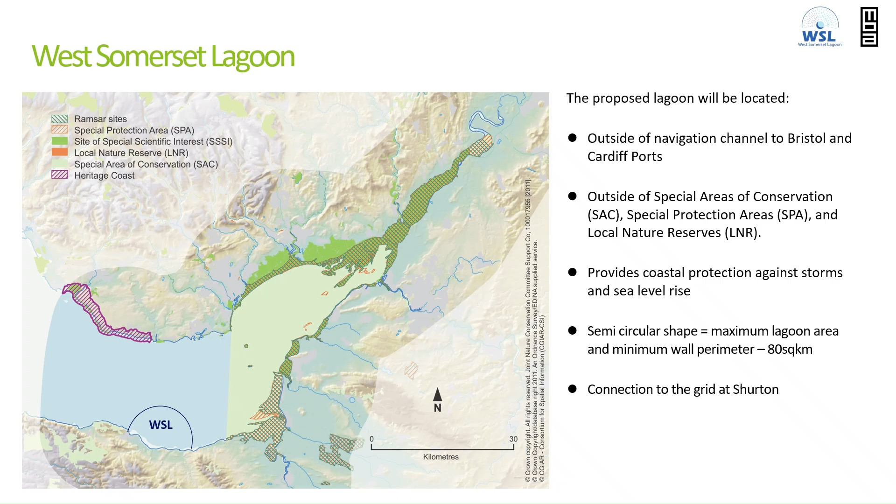And there is a connection, it's actually not shown on here, to the grid at Shurton, which is about there. So basically this is the wall that's created, and within the wall are turbines. And the way that this works is that it could actually produce enough energy for 2 million homes, and it's energy that's secure. We reckon that if we can get these caissons built in various ports all around the Severn Estuary, it could actually be built in 5 or 6 years, because it's all off-site construction.

It's cost effective. I know it's a lot of money. It's almost 11 billion pounds, but it's actually cheaper than nuclear, and it's cost effective in terms of offshore wind as well. And wind and solar lasts about 30 years. Nuclear lasts about 60 years. This could last 120 years. And it's completely reliable and completely predictable. And you can harness the energy both on the ebb and the flood tides.

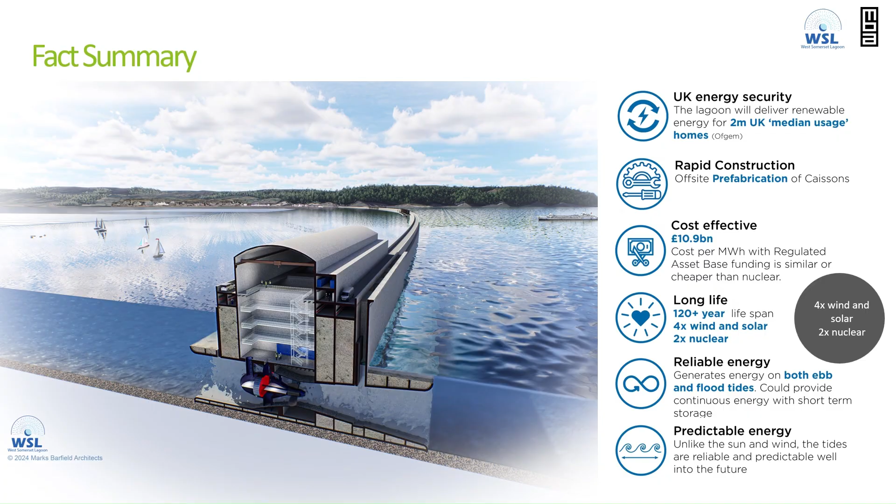So this is the emerging master plan that we've created. It's located on one end in Minehead and the other just away from Watchet. All of these things may not happen, but we've created a master plan to show how, Minehead at the moment is an area of deprivation. There are a lot of young people leaving Minehead because there's no jobs. Butlins is there, but that's seasonal jobs, and the economics doesn't go back into Minehead. So it could have a really significant regenerative effect in the area, as well as creating the energy.